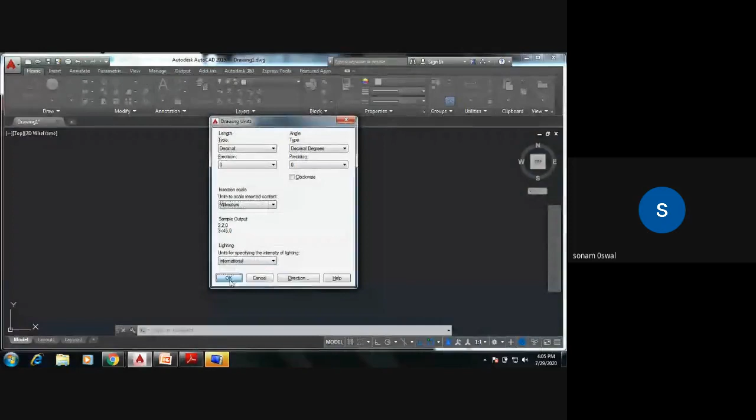Okay, because we give the dimensions, the units are very important. So what we have done, the precision is 0, and the units are set to millimeters, because to sketch the assignments it becomes very easy in millimeters. So this was the second step.

Now the third step was we have to define the limits. LIMITS. Now what the AutoCAD is asking you is to specify the lower left corner, which is 0,0. So you have to just press enter.

Next thing is we have to define the paper size as 420 comma 297, enter. Why have I given this? Because I have set it to A3 paper size. So it is again the choice of the users, whichever you want.

Now so these were the three steps. First of all, the UCS icon. After that you set the units, and then you set the limits. Okay, so we have defined these.

Now next, we need to do the drafting settings, because we need to be ready to prepare the drawings. Before that, you have to make your ortho mode on, which is F8. So what I'll do, I'll press F8. So ortho mode is on, because the ortho mode gives me straight horizontal and vertical lines.

Okay, now next thing I have to do is DS, that is drafting settings. Now what you have to do here in drafting settings is set the object snap modes: endpoint, midpoint, center, which we learned about yesterday. So it gives you the flexibility in the drawings whenever you keep the object snap modes on.

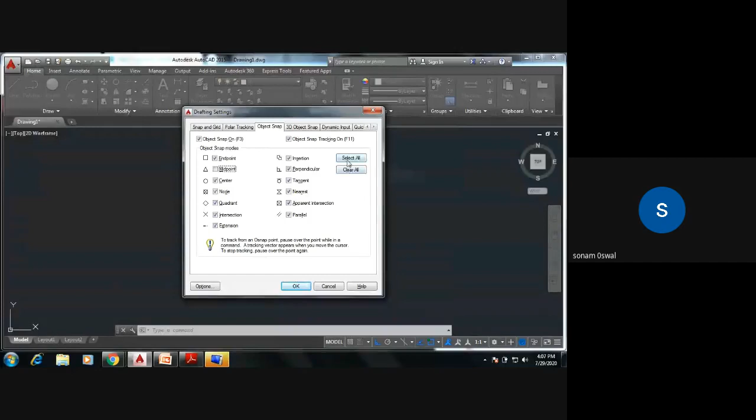So make sure you select all, otherwise sometimes the midpoint is unchecked. So what happens is you go to make the drawings, and whenever you want the midpoint, it's not visible. At that time you have to select all. Now the prerequisites are done, so we are ready for the further task.

Now the today's agenda is what we are going to learn today: the rectangle command, the circle command, arc command, and the types of circle command, and the assignments on it. Now let's move to the rectangle command.

So from here you can create the rectangle. It creates a rectangular polyline. Why is it called a rectangular polyline? Because the rectangle consists of many lines, and whenever there are many lines, we call it a polyline.

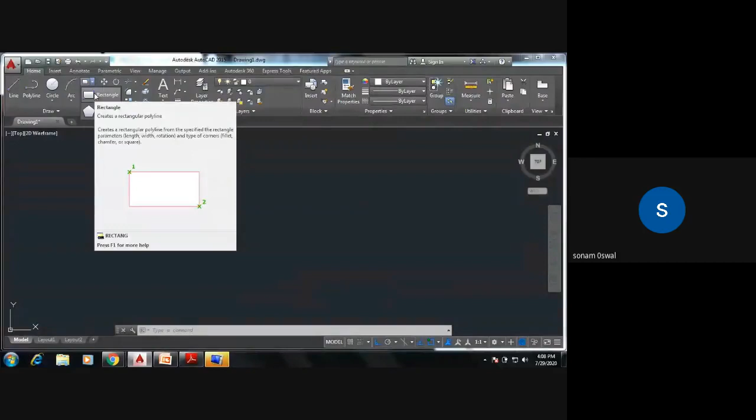Now what I'll do, either I can select from here, or I can type from the keyboard: REC, rectangle, enter. Now whenever you enter it, it is asking you to specify the first corner point.

So I'll give the first corner point. After that, it is asking to specify the other corner point. So I'll just click for the other corner point. See what I got - a rectangle.

Okay, but this rectangle is not as per the dimensions, it is just a rectangle. As we discussed earlier, we engineers never do vague drawings. We need the dimensions, we give the dimensions, because without the dimensions we cannot proceed further. So what I'll do now is make the rectangle with the help of dimensions.

REC rectangle. Yesterday we learned some smart commands as well - to repeat the previous command, press the space bar. Specify the first corner point. Now, since I want to use dimensions, my input would be D for dimensions. Now it will ask you to specify the length for the rectangle. Suppose I say 100, enter. Specify the width for rectangle, suppose I say 150. See, I got this rectangle.

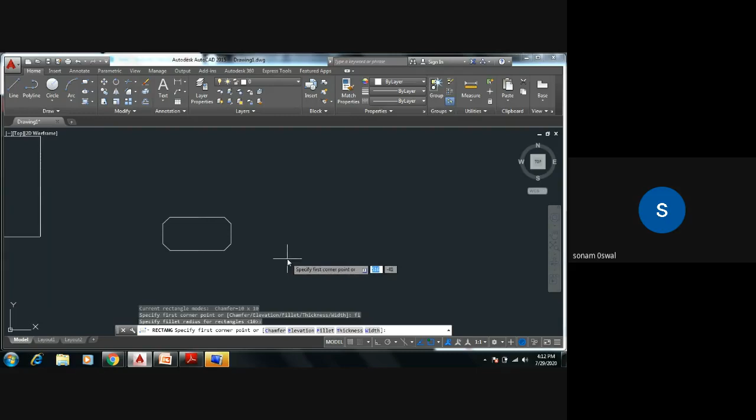Once let me show the filleted rectangle, then I'll revise how to do it. See what I'll do, to repeat the same command, space bar. Now you have to give the input, that is fillet - FI fillet, fillet radius is 10. Then specify the first corner point. See, in this way you got it. Now next, the same process - D for dimensions, so 100 for length, and suppose width also if I give 100. See, in this way you got a filleted rectangle.

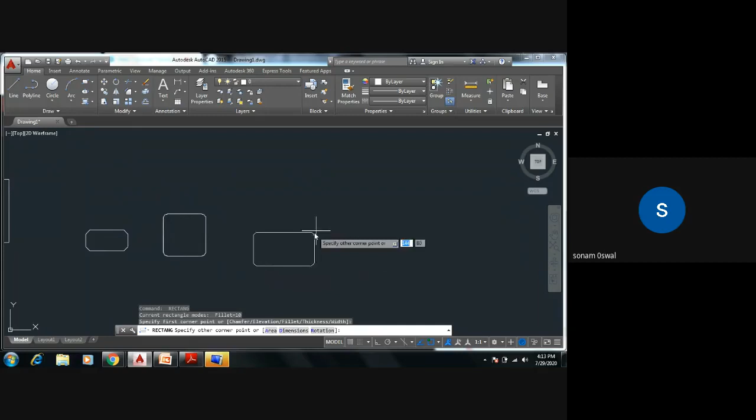So first case we learned was a normal regular rectangle. In the second case we learned chamfered rectangle, and in the third case we learned filleted rectangle. Now next step - suppose I want a regular rectangle. Spacebar to repeat the same command. I'll specify the first corner. I'm not giving any initial input as of now, but still, what is happening? I'm getting a filleted rectangle.

How is it possible? Can anybody suggest me what it can be? Any logic? You can type it in chat. What could it be? Can anybody say the logic? I want a regular rectangle, but still it is coming out as a filleted rectangle. Any logic from anybody, guys?

See, okay, what I can do over here is REC rectangle. The initial input you gave was FI for fillet, I will make it 0. Enter. And then if you specify the first corner point, in this way you got a regular rectangle. Is it clear? So in this way, this is the rectangle command.

See what we have learned - REC rectangle, specify the first corner point, yes you have specified it. Next step is D for dimensions. After D for dimensions, specify the length for rectangle, that is 100, enter, width 100, enter. You got like this - so this is a regular rectangle. Z enter, A enter. Okay, so this is a regular rectangle.

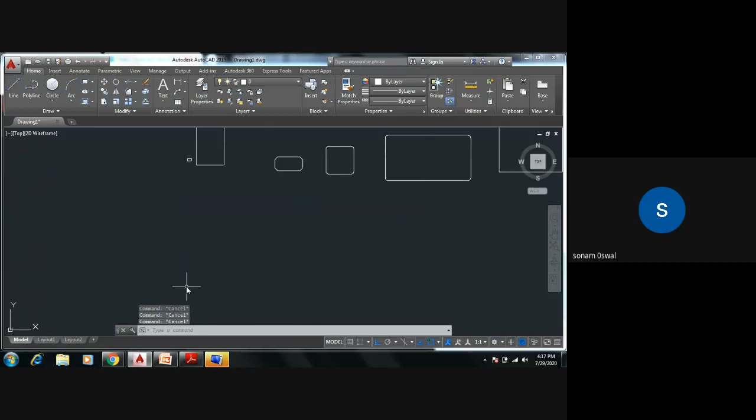Now I have made it randomly. So this is what the rectangle command. Okay, now next step is we are going to learn about the circle. Is it clear? Everybody got the rectangle command?

Yes, very good, even Kiran has answered it. Yes, everybody got the rectangle command. Is anybody having doubt, or should I repeat? Let me know in the chat box. If you got it, if it is cleared, press yes. If not cleared, press no. Otherwise I'll move to second command, that is circle. Okay, I think so everybody got it.

Okay, now we'll go for circle. There are various types in circle command. So if you look over here, there are types. So first is what? Center radius. What does this mean? It creates a circle using a center point and a radius.

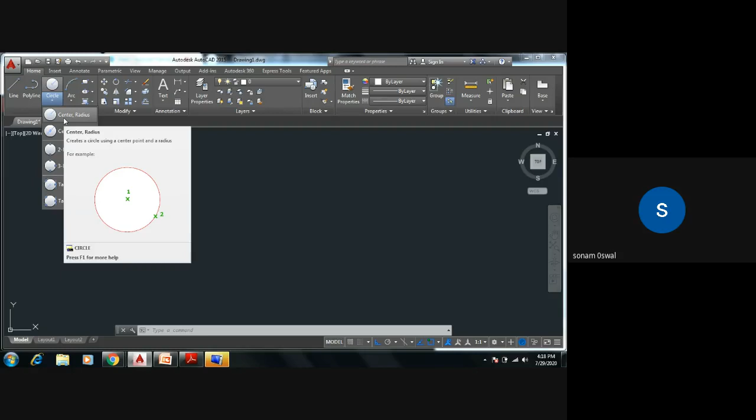Okay, so what I have to do, specify a center point, and then you can give a radius, whatever the radius would be. Suppose I give the radius as 45. So in this way you are getting the circle. Okay, see, so this was with the help of what?

From here you can go with the help of keyboard as well. So initially we discussed that AutoCAD is a shortcut based software as well. So C, if you press C for circle, then specify the center point. Then R for radius, already by default it is being selected. Just give suppose 100, you are getting it like this.

Suppose if you want to give the diameter, then what you will do? Again spacebar to repeat the same command. Specify the center point. Then D for diameter, and then you can give the diameter as 150. Okay, so in both the ways you can do it.

Suppose if the requirement is to give the radius, you can go with the radius, by default it is there. If you want with the diameter requirement, you go with the diameter, because normally when you place the dimensions, it is in the form of diameters, as per the rules of dimensions as we learned during our engineering graphics. So these are the circle, first type.

Then second type, suppose the center diameter, I told just to see, specify the center, and directly you can give the diameter as well. Suppose if I give 250 as the diameter. So in this way also you can create the circles.

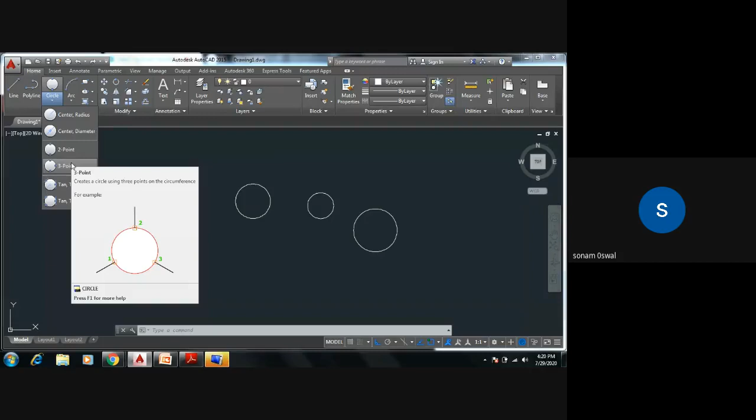Okay, so that is 2 point. After that 3 point is nothing but using 3 points on the circumference. See like this, first, suppose second, and third, wherever you are going to click it like this. So in this way, this is using the third point, using 3 points on the circumference. Now next step is we are going to learn the most important types.

These two are more important, and this center, radius, and diameters are important. These 2-point and 3-point options are rarely used, but you should know them. In applications, tangent-tangent-radius and these two, that is radius and diameter, are used more frequently.

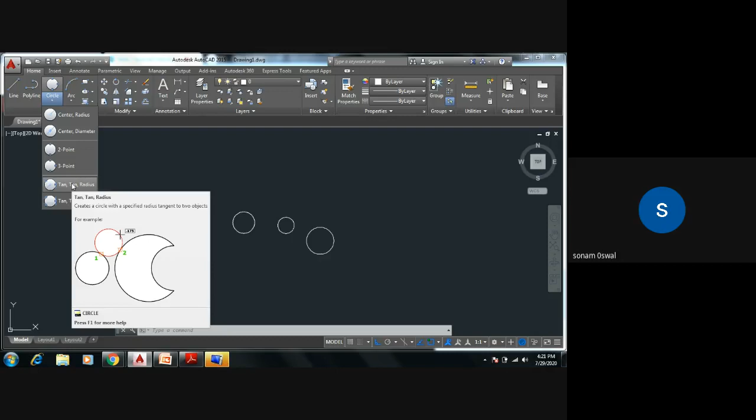Now let's see what is this, tangent tangent radius. By the name tangent tangent radius, what you come to know is that it creates a circle with a specified radius but tangent to two objects. Let me simplify it for you.

Now the simple thing is, if you go for C for circle, then TTR, that is tangent tangent radius. If you specify the first point, select the second point here, and specify the radius, suppose 208, then with the help of this point and this point, you get the circle. Is it clear? So this is tangent, tangent, radius. Once again I'll repeat it.

Control Z. C for circle, see, with the help of this also you can do it. C for circle, then TTR, that is tangent tangent radius. Then specify point on object. Suppose if you select the first point, second point over here, and then specify the radius, anything, suppose 150, in this way I'm getting it. So this is what tangent tangent radius. Is it clear?

After that, the next step is tangent tangent tangent. This creates a circle tangent to three objects. So if you select it, suppose you give this first point, second point, and suppose third point, considering these three tangents, it will create a circle.

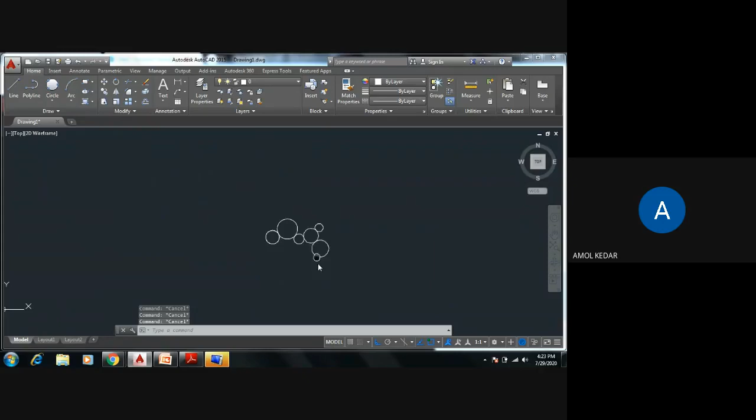So this is tangent, tangent, tangent. Using three circles' endpoints, we are getting a circle. So this way also we use it, but most frequently you're using tangent tangent radius, because in the assignment also I'll show you the application of it.

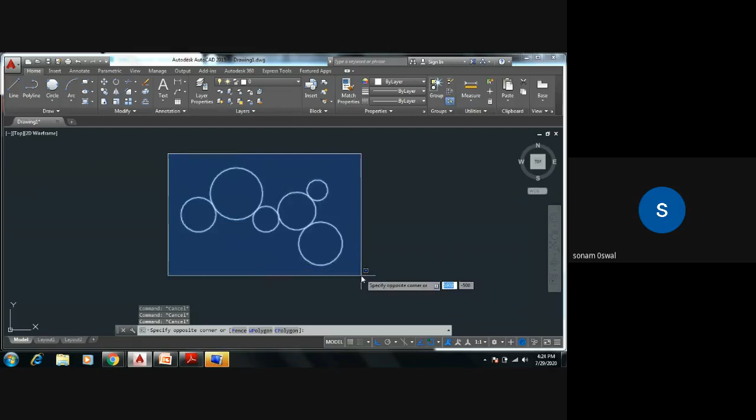Now next we'll move ahead. Suppose yesterday we have learned about the arc. Once again, I'll be repeating it. Suppose L for line.

After that, the next step is we have to go for arc over here, that is start end radius. Specify the start point, specify the end point, and in this way you can create it. Suppose 25 I give, so in this way you are getting it.

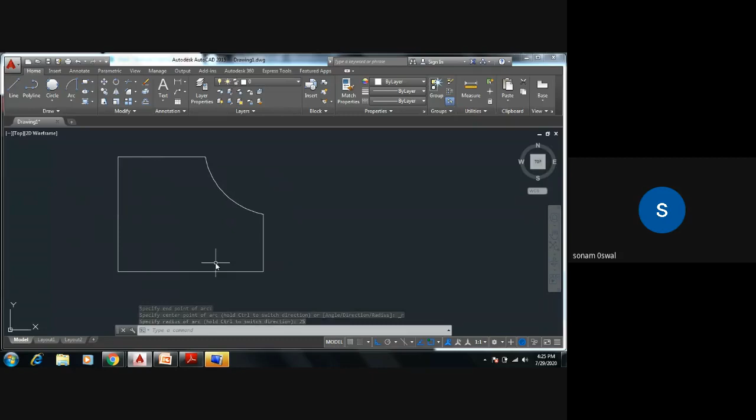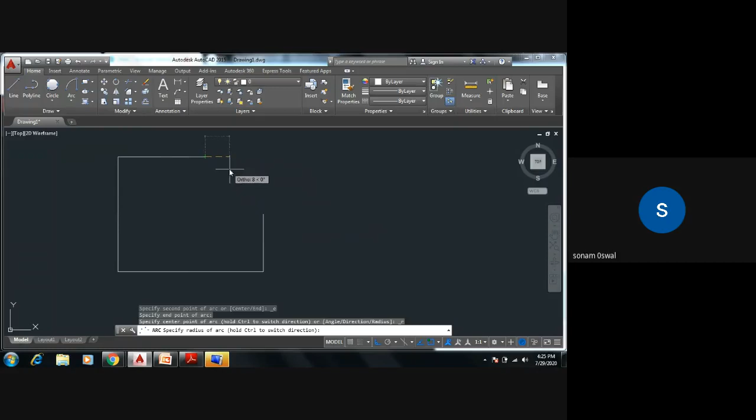Suppose if I want, this is from inside because I have defined my start point from here. Suppose if I define the start point from the end, let's see the difference. Again, start end radius. Suppose if I give this as the start point, this as the end point, then in this way, you are getting like this.

Suppose 20 if I give the radius, in this way, this is the arc. Is it clear? Are you getting it? The arc, and the types of circle.

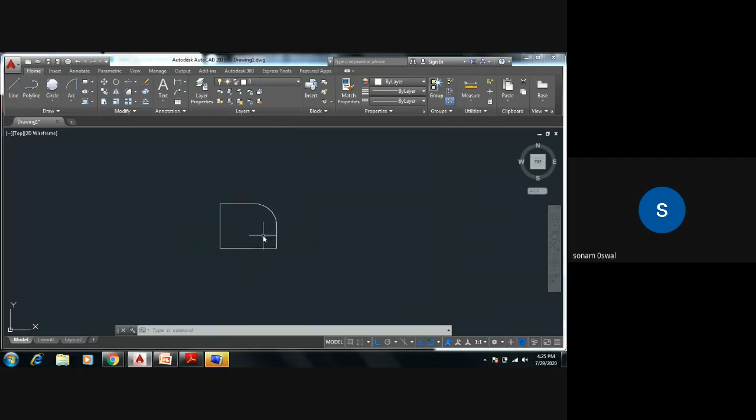Now the next command we are going to learn is fillet. Now you will say we have already learned the filleted rectangle. See, separately, if you want to give the fillets, there is a command of fillet as well. For example, REC for rectangle, if I make it like this, D for dimensions, length is 150 and width is 100.

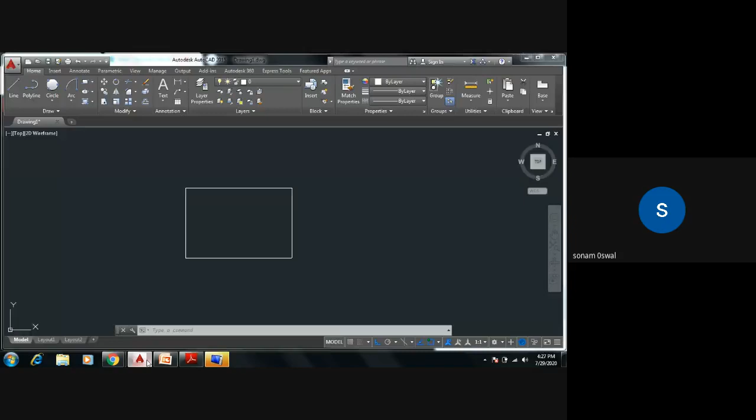Kiran answered that if we want curve, then we use fillet. No, this is not the correct technical answer. So anybody can answer me why we use fillet.

See fillet, see what, why, and how I categorize in this manner. So what is fillet? The rounds at the edge, fillets. It's okay, but how, that I'm going to teach you in the tool.

Why do we use fillet? Siley answered that it gives sharp ends. No, you're close to the answer. Can anybody give me the perfect answer, or more accurate?

If we don't use the circle command... yes, then we need to trim the external or extra portion after using this. Or in fillet, we can directly give the 2 points. Otherwise, there is no need to trim.

So this is actually from a software point of view, we do the modifications, but I want the technical answer. You all have learnt about it, and why fillets are used.

Siley answered: stress concentration can be lowered by using fillet. Yes, very good. To reduce the stress concentration, we use the fillet.

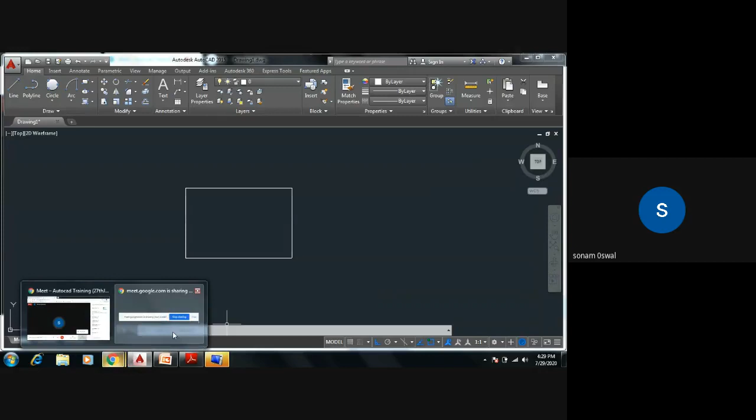Now the answer of fillet was correct. Now let's see how to use the fillet command in software. Type F-I for fillet, enter. Then it is asking you to select the first object.

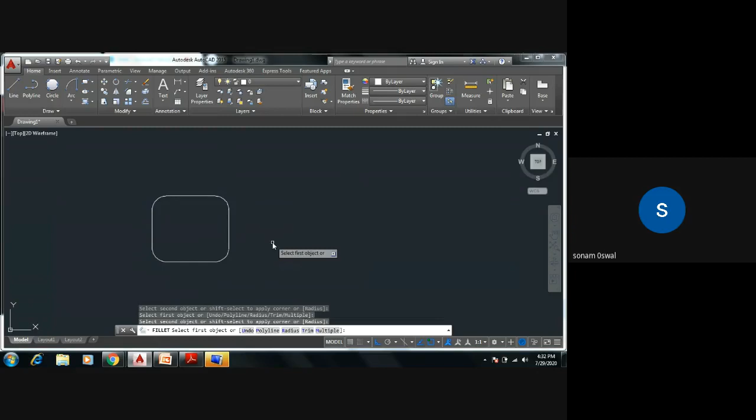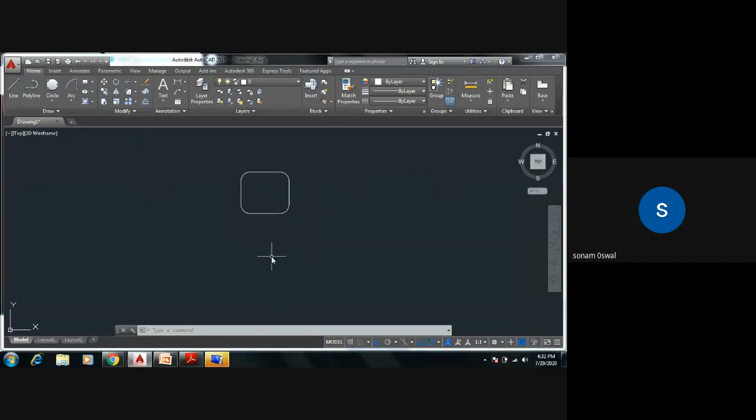So in this way, I got the filleted rectangle. Within the rectangle command also you can use fillet, externally also you can use it. I explained the fillet command now because one of the assignments requires applying the fillet command. Is it clear now? Any doubt in the fillet command?

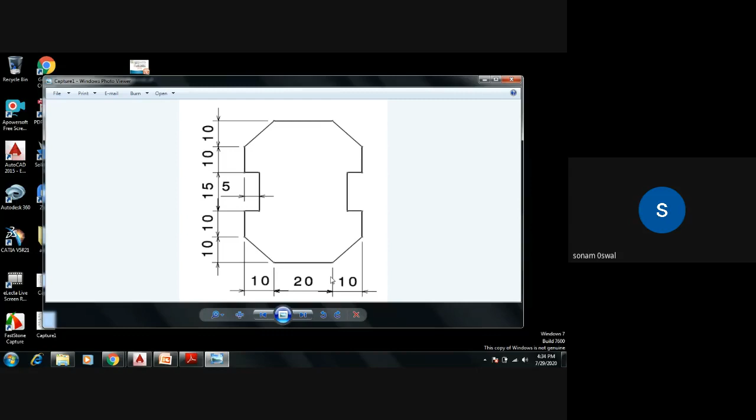Okay, now what we'll do is I'll show you one of the assignments. Suppose this is the assignment - is my screen visible to all? First we are going to apply chamfered rectangle. Is it visible? You can type in the chat box, yes, the assignment is visible. Yes, okay.

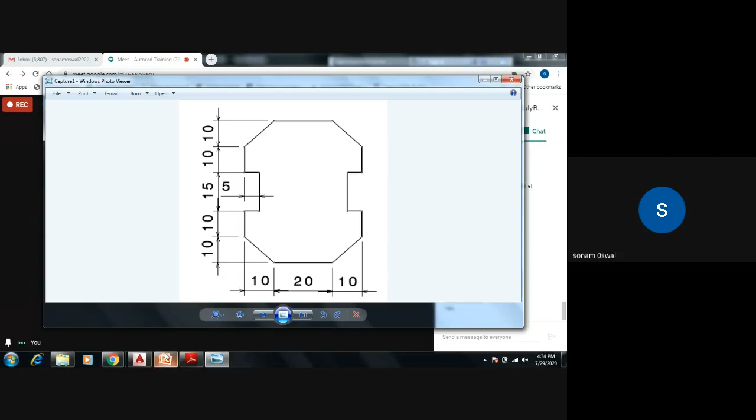Okay, so see what I'll do now. If you look at this, I can make it more simple. We can see that there can be a different methodology also - someone can make a line and then go down like that, something like that, okay. But what we can do is use chamfered rectangle. Simple - REC for rectangle, okay, then CHA for chamfer, you give the unit.

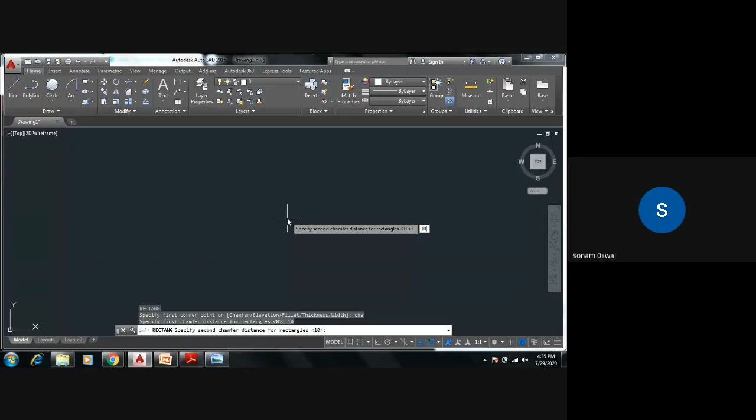Okay, first specify the chamfer. How much is the chamfer distance? That is 10. So you can go for chamfer distance as 10, enter. Second also 10, enter. Okay, then specify the first corner point - you are specifying the first corner point.

Next step is D for dimensions. In dimensions, specify the length, that is 40, enter. And width is how much, 55, enter. So in this way I got it - see how simple we have done it.

Okay, now next step - you have to go like this down. So yesterday whatever we have learned, we are going to apply over here. So L for line. If I go down over here, how much? 10 mm, enter. Then suppose 5 mm, enter, and 15 mm, enter.

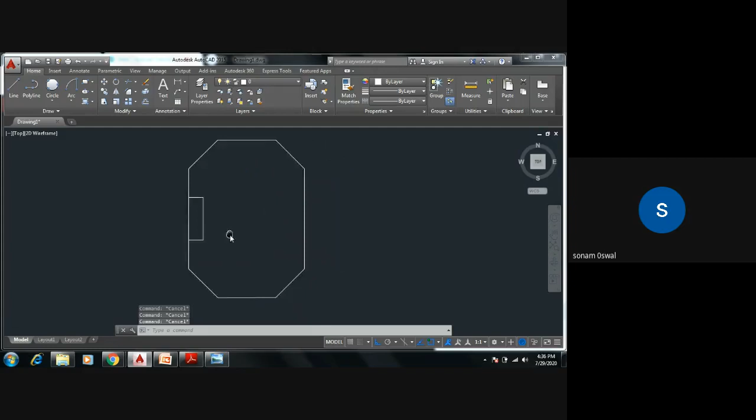So in this way you got this. Is it clear? See, now what we have done here, we just used the chamfer command I showed you. Now you'll ask what about the further thing, how to do it - so here we need to do the trim. I have not explained trim yet, so later on we'll come to this and I'll explain it. So just to apply the chamfered rectangle command I used this assignment - that's all, just how to make it, or how to recognize which command smartly we can use.

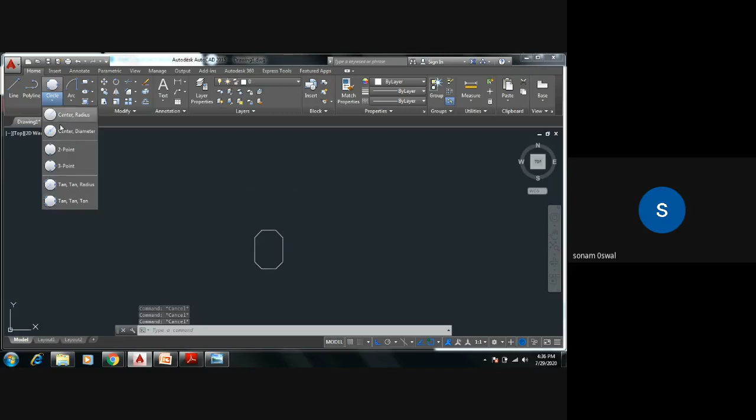Okay, is it clear? Now we learned this command, tangent radius. Now we'll apply that, and we'll also apply this - whenever you track the line distance, for example L for line, when you take it and place it here and then put the distance over it, like 10, without creating the line - so that application we'll see in an assignment too.

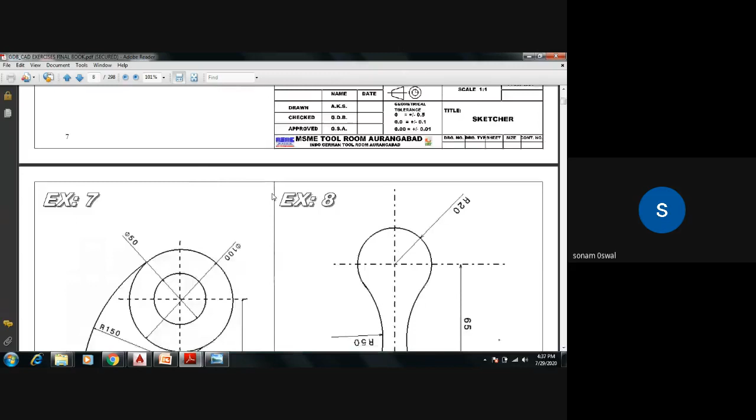Okay, this assignment we are going to see. Okay, so this we are going to solve. Is it visible to everyone? If it's visible, type in the chat box yes or Y. Okay, yes, okay, thank you.

Okay, now we'll move forward. Let's see how to solve this assignment. Okay, what we'll do - we'll start from the base. What is it? 96 plus 10 plus 10, how much does it become? 116. 116 by 25 - we'll make a rectangle of 116 by 25.

Okay, so REC for rectangle. Then specify the first corner point - but I'm getting a chamfered rectangle. So what do you have to do? You have to make the chamfer distance 0. REC rectangle, okay, then chamfer, enter, make it 0, enter, 0, enter.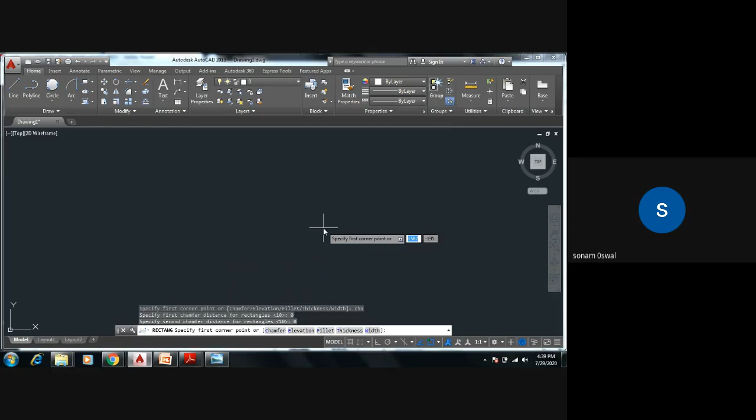Okay, specify the first corner point, and then D for dimensions, specify the length, that is 116, enter. Width is how much? 25, I think so. Escape - it's 25 only. So I made a rectangle of 116 by 25.

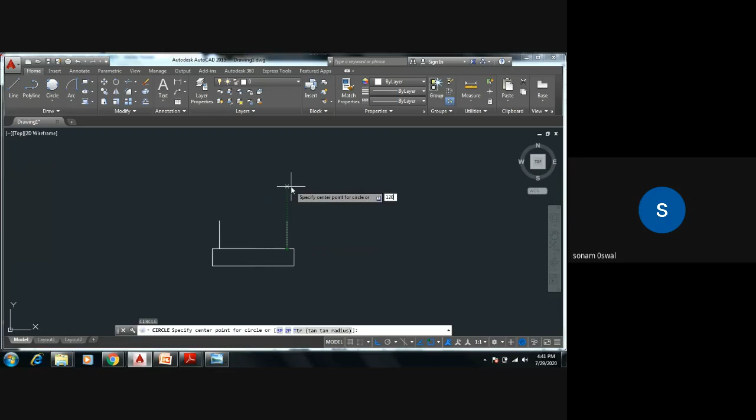Or how much is the radius? So diameter was given as 100. So what you have to do, you have to switch to D, that is D for diameter, enter. How much it is, 100, enter.

Okay, again what you have to do, diameter 50. So again space bar to repeat the same command. Okay, and then you can go like this, D, enter, that is 50.

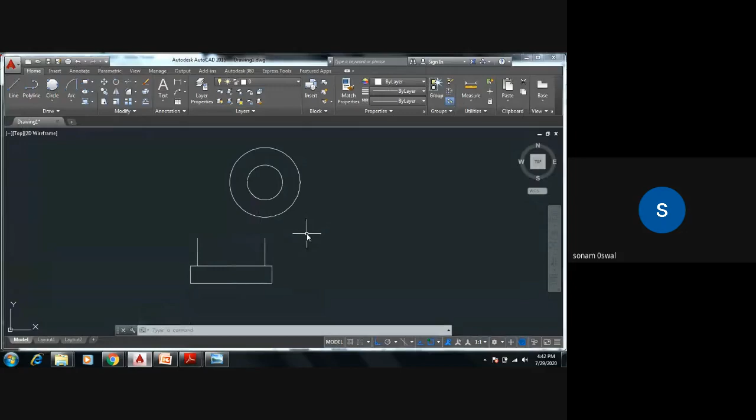Okay, now next step is what, you can make a fillet over here. Okay, so that's why I explained you the fillet, so that it would be easy for you to understand. So F for fillet. Okay, then what you have to do, the second input is what guys, can anybody answer me, second step or the input, what is required for fillet?

What is required? Okay, it's R, radius. Okay, how much radius you have to give, that is 45, enter. So select the first object and the second object. Okay, so in this way.

Is it clear? Okay, now how to create this one, that is radius 150. Can anybody answer me? Guys, can any logic? How I will create such an arc?

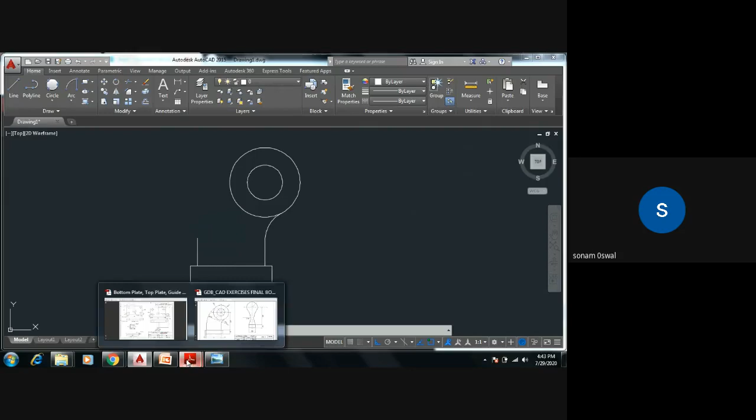Yes, Kiran, Yash, they have answered very correctly. Omkar has also answered previous answer. Okay, so now the answer, can anybody answer me? Which type am I gonna use over here? This arc, radius 150, which type will I use? Can anybody answer just the type? Yes, very good, Umair has answered me that is tangent radius. Yes, Omkar has also said that is TTR. Very good, you guys are getting it and they have been interactive as well.

Okay, very good. Okay, so what I'll do, C for circle. Okay, then what I'll do, TTR. Exactly, okay. Now what you have to do, whenever you go for TTR usage, you check it, where the points - endpoints which I have to select, that is approximately here and then here.

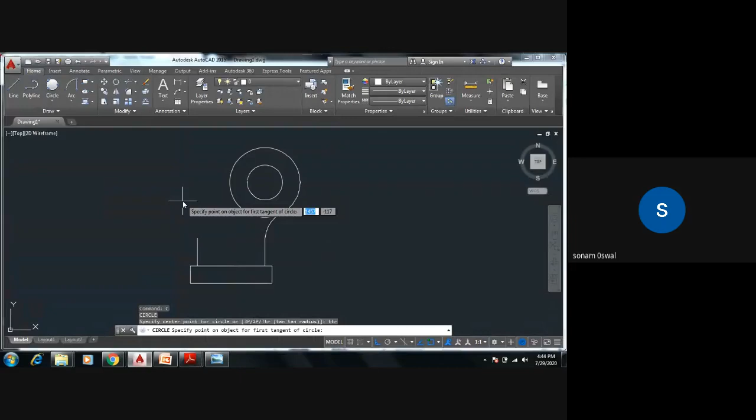Okay, so what you will do over here, that is tangent radius. So specify the point. Suppose if I specify here, then second here, and the radius is how much? 150. So in this way I'm getting it.

Okay, now what I have to do over here, this extra part, how will I remove it? If I select it, the whole circle is being selected. So here, the next command I will explain you, that is trim. Okay, so TR, enter first of all, and like this, in this way you can trim it out.

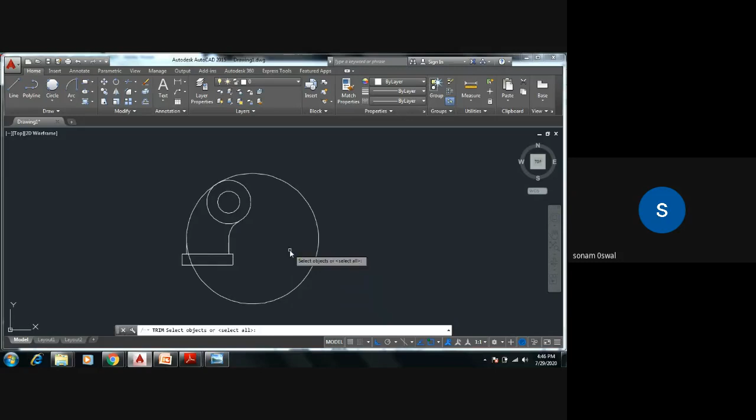इज इट क्लियर? नाउ हाउ यू आर गोइंग टू अप्लाई ट्रिम कमांड, TR, जस्ट दैट इज द शॉर्टकट. ओके, सो TR एंटर कर दो, 2 बार एंटर सिलेक्ट किया तो आपको द रिजल्ट मिल जाता है. समझ में आया? So you got the end result in such a way.

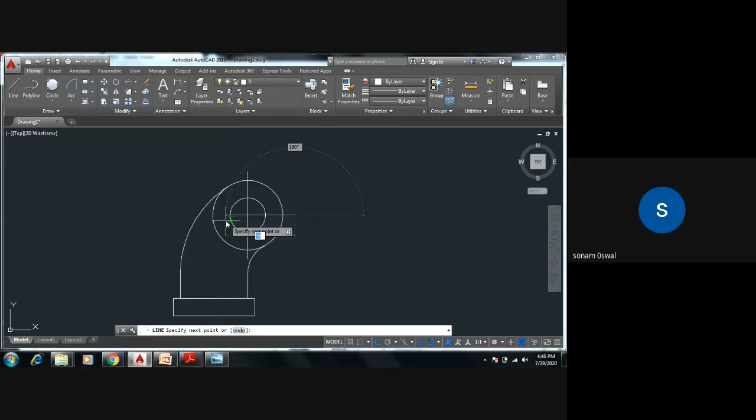So L for line, अभी यहाँ पे मैं lines बनाऊंगी. Okay, so in this way you got it. So in this way we have solved this assignment.

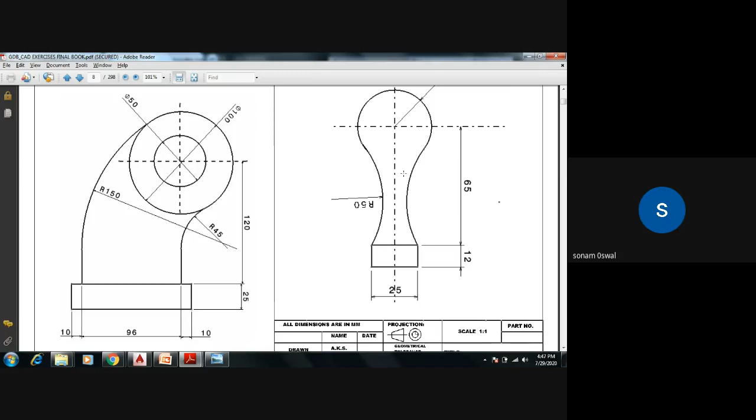अभी suppose ये assignment भी मेरे को solve करना है, तो in the similar way only we are going to solve. क्या यूज करेंगे यहाँ पे, रेडियस 50 को. चलो let me know who can answer it. बाकी का आपको समझ में आ सकता है कि बेस मेरे को बनाना है 25/12 का, एट ए डिस्टेंस ऑफ 65 पे एक सर्कल लेना है, दैट इज रेडियस 20 का, और उसके बाद रेडियस 50 लेना है यहाँ पे. चलो, हु विल आंसर मी इन अ चैट बॉक्स, बी फास्ट.

फिलेट यूज करेंगे और TTR. एनीबडी एल्स कैन आंसर मी? फिलेट इतना बड़ा बैठ सकता है? TTR. Okay, yes, Kiran has answered correctly. Arc you can go for, start end radius arc. Yes, very good.

Okay, now what I'll do, base will make, that is rectangle 25/12. So REC rectangle. Okay, so D for dimensions, that is length is 25, enter by 12, enter.

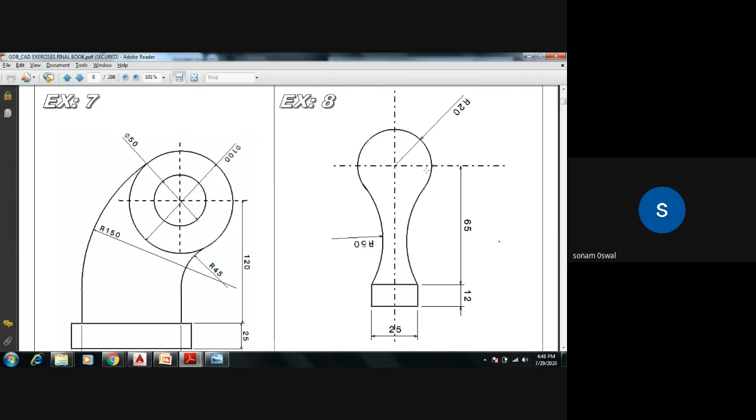ठीक है, उसके बाद एट ए डिस्टेंस ऑफ 65 पे सर्कल बनाना है. सो सी फॉर सर्कल लेंगे, सेंटर से ही अपने को बनाना है एट ए डिस्टेंस ऑफ 65 पे, रेडियस है यहाँ पे 20, तो डायरेक्टली मैं रेडियस डाल सकती हूँ. देखो रेडियस 20 दिया है, सो नॉट नेसेसरी टू गो फॉर डायमेंशंस.

ठीक है, तो देखो आपको जितनी प्रैक्टिस होगी उस हिसाब से समझ में आएगा कि कौन सा कमांड कहाँ पे प्रॉपरली यूज करना है. जैसे आज सेकेंड डे में आपको काफी नॉलेज हो गया कि आर्क्स कौन से यूज करने के, TTR कहाँ पे यूज करना. वेरी गुड नॉलेज, आई अप्रिशिएट करती हूँ कि सर्कल में जो भी टाइप्स आपने सीखे उसका एप्लीकेशन आप तुरंत कर रहे हो, इसका मतलब यू आर गेटिंग इट वेरी गुड, एंड वेरी गुड प्रोग्रेस आई वुड से.

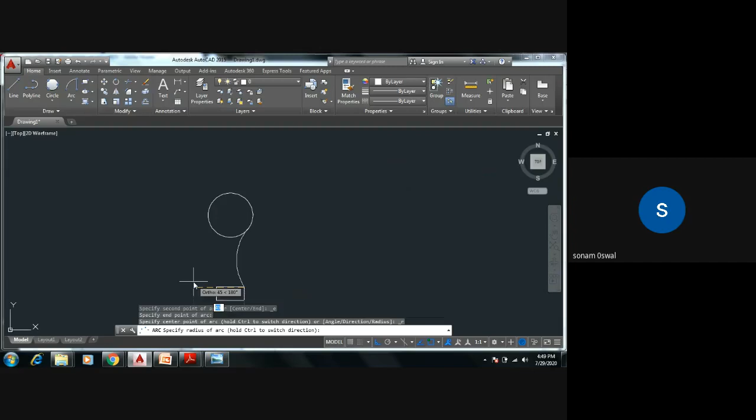नाउ नेक्स्ट स्टेप इज व्हाट, रेडियस विल टेक 50. अभी स्टार्ट एंड रेडियस करेंगे. सो दिस वुड बी माई स्टार्ट पॉइंट और एंड पॉइंट, सपोज मैंने यहाँ से लिया, ये सेकेंड, ये लिया, ड्रैग किया. देखो कितना है, वो 50 है, yes 50 है, I got it.

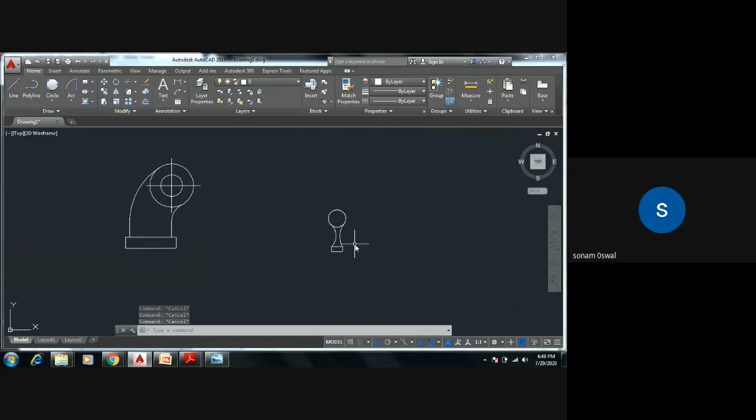Again what I will do here, go for space bar, again enter. ओके, कितना है, 50 है. तो ये एक्स्ट्रा आ गया तो इसको ट्रिम कर सकते हैं, आप ऐसे ट्रिम कर सकते हैं. तो इन दिस वे यू गॉट. नाउ हियर आप बोल सकते हो कि मैम आपने डबल टाइम्स क्यों यूज किया, इफ अ स्मार्ट गाय वुड बी देयर देन आप मिरर यूज कर सकते थे यहाँ पे. यस एग्जैक्टली, बट मैंने अभी आपको मिरर एक्सप्लेन नहीं किया है, सो वी विल बी अपडेटिंग इन अ कपल ऑफ टाइम्स में. ठीक है, सो यहाँ पे मिरर से भी आप कर सकते हो. ये जस्ट मेरे को आर्क एक्सप्लेन करना था, इसीलिए आई हैव यूज्ड दिस असाइनमेंट.

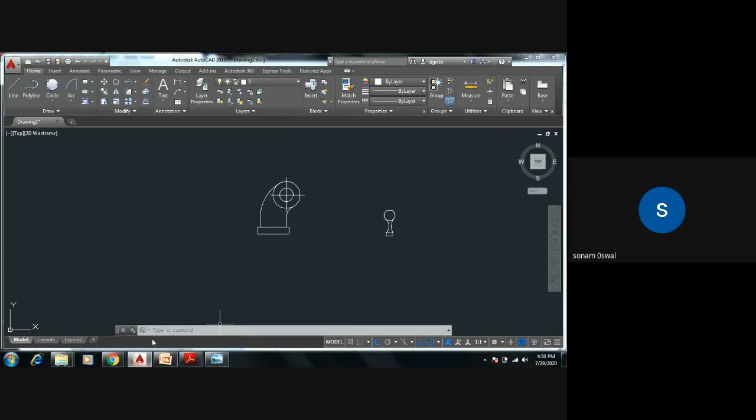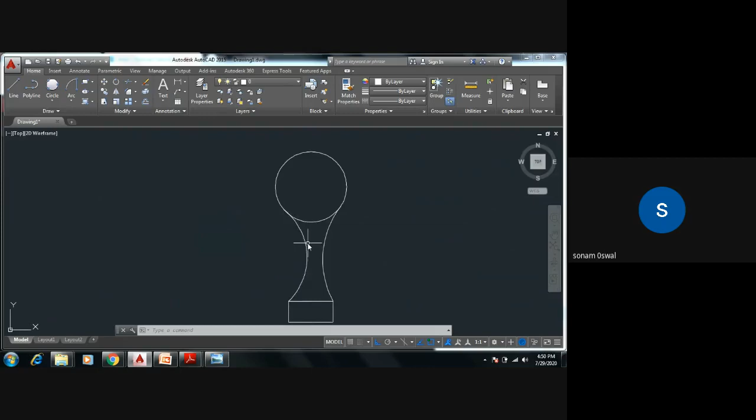मिरर जब सीखेंगे तब आपको इसमें एप्लीकेशन हो जाएगा मिरर का, so is it clear? Okay, why it is looking uneven? Yes, a very good question, Yash ka. Why it is looking, see, because what happens here, I'll show you. ये जो ऊपर पकड़ा है एंड पॉइंट, वो सही से मैंने नहीं पकड़ा जानबूझ के. तो सपोज कभी कभी प्लस माइनस हो सकता है, तो यहाँ पे ज्यादा स्मार्ट कमांड यूज कर सकते हैं, दैट इज मिरर. सपोज मैं मिरर यूज किया, एम आई फॉर मिरर, सिलेक्ट ऑब्जेक्ट किया, राइट क्लिक, स्पेसिफाई द, डोंट वरी आई विल एक्सप्लेन यू अबाउट द मिरर, जस्ट मुझे अनइवननेस जो आया है उसके बारे में आंसर करना है. एंटर. ओके, नाउ यू आर गेटिंग इवन.

Yes, Yash and Amol, are you satisfied now? Yeah, because the endpoints, whatever we have selected over here, was not proper way. There was unevenness into it, so it becomes like that. Okay, so now you got the mirror, from mirror you are getting it, because whatever I have taken here, the similar replica you will get over here.

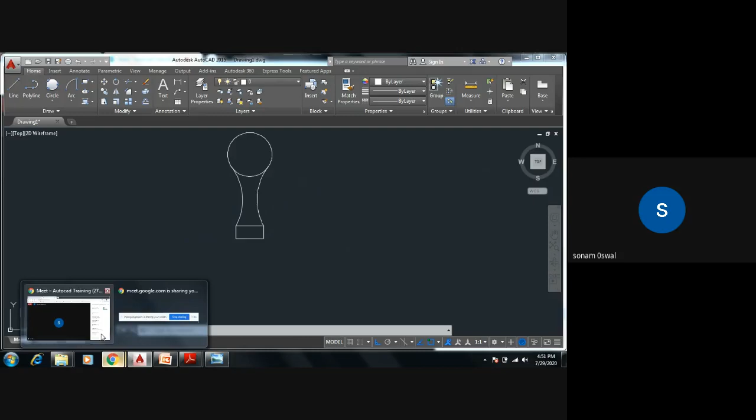Can we use TTR? Yash's question is, can we use it? Yes, we'll give it a try. You can use n number of ways, no issues. It's not hard and fast that you go with this only. Okay, let's try for TTR.

Specify the first point, like this, second point. How much is the radius? 50. So you will get like this.

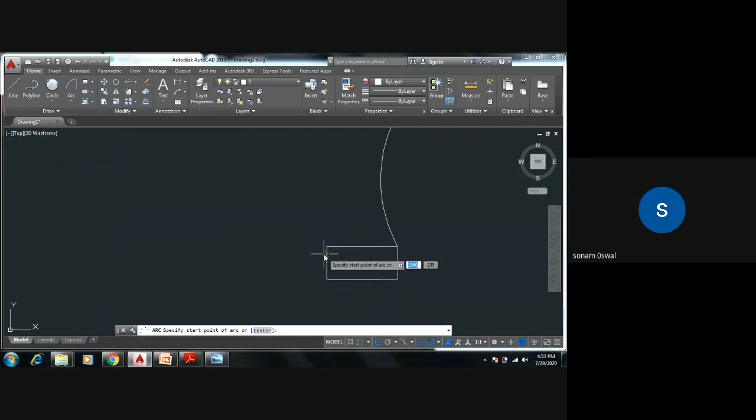So what we'll do, we'll go for arc, start and radius, and I'll see from where the endpoint I have selected. So I'll select like this, specify the first point, then specify the second point, and then drag it, so I'm getting it like this. So the solution would be second, I can use this as the start point and this as the end point. So we'll go for start and radius, and this is the start point.

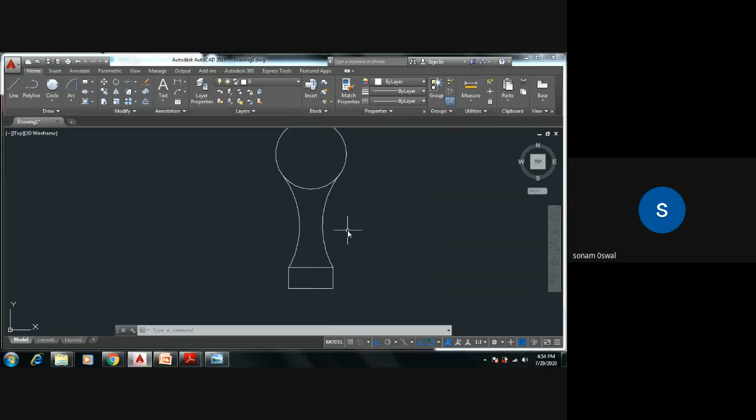I'll go here like this. So in this way you are getting it like this, suppose 50. So using arc, what you have to do is see where it is starting. It takes more time if you use the arc command again. So instead of that, you can use the mirror command. It varies inward and outward.

Yes, exactly, that issue comes over here. If you go for mirror, it becomes a very simple solution. In arc it becomes like that. Don't worry, we'll come to mirror command as well. Are you clear now on the arc command and why I have used mirror and not TTR? You might be getting it.

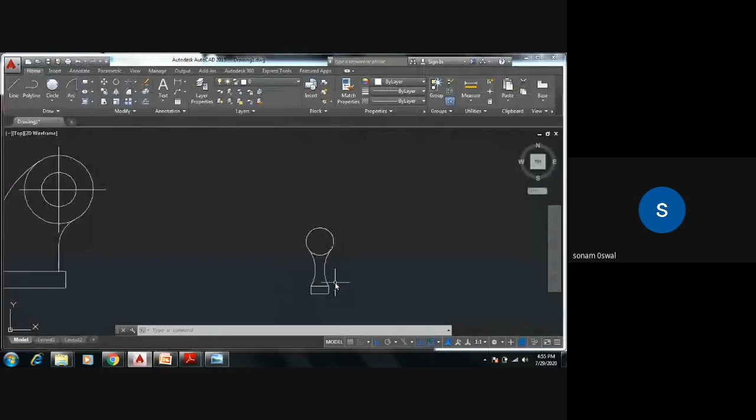So inward outward, it depends upon the endpoints. If whatever your start point is from lower, then it will take inward. If start point is from the upper side, then it is outward. Domer, are you getting it? Okay, yes. So you have got good understanding of arcs, TTR. Whenever you will solve it, looking at the assignments, you will come to know automatically.

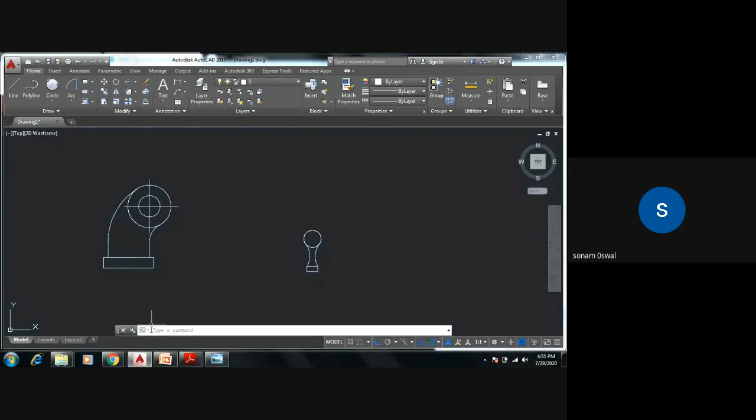Now the next step is we are going to learn about a command that is called offset. We are going to learn about offset.

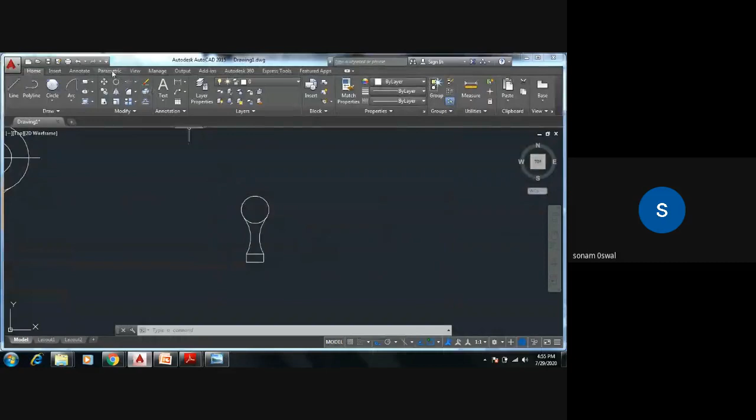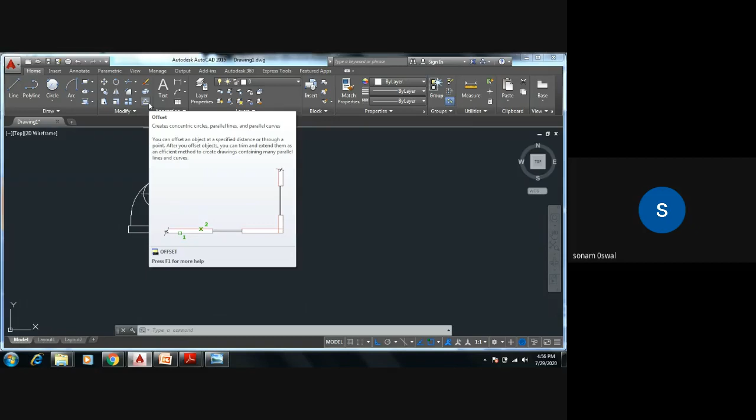See, offset is for what? Parallel lines through a distance. So this offset comes into modification, we are switching to modification commands, this compartment. Step by step. Now the offset command creates concentric circles, parallel lines and parallel curves. So you can offset an object at a specified distance. Meaning if you want to make parallel lines, parallel curves, or concentric circles, for that you can use offset.

So what you have to do, suppose if I go for a rectangle command, I make a rectangle over here. Now the next step is you have to go for offset command, that is O for offset. Offset, specify the offset distance. Offset distance, how much? Suppose if I'm giving it 15.

Okay, enter. Select the object and enter. So in this way you are getting the result in front of your screen. You got the parallel or concentric rectangles, or parallel with a distance rectangle.

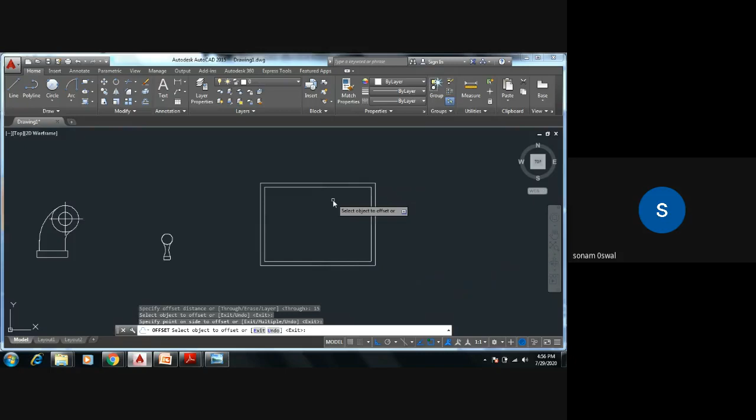So in this way you can select, and you can give the outside as well. If you select and give 25, you can change the distance as well. So in this way, if you want 25, you can change the distance like this.

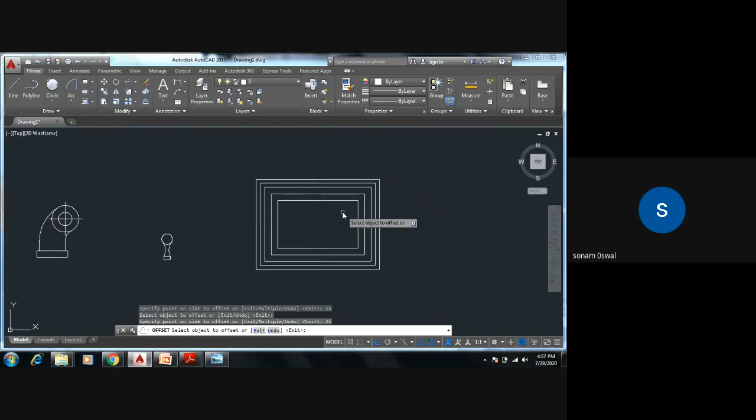Now next step is what? Now the whole rectangle is being offsetted. But I don't want that, because during civil plans, whenever you make like this and if you want only a single line offsetted, then how?

Suppose the second case, if I take a rectangle, and if I select it, the whole rectangle becomes a single entity. Now what I have to do, I will make this single entity into multiple entities.

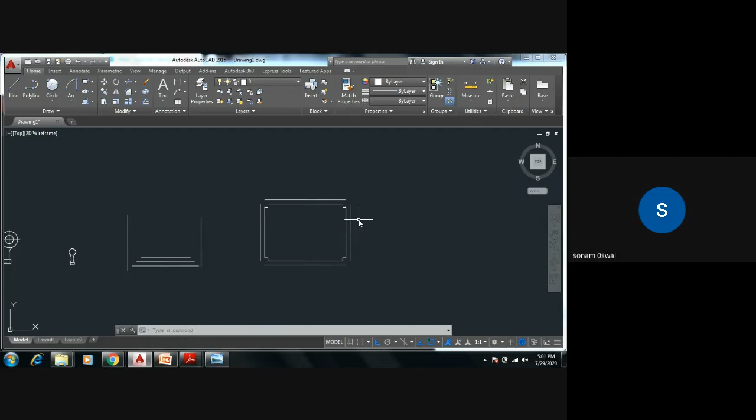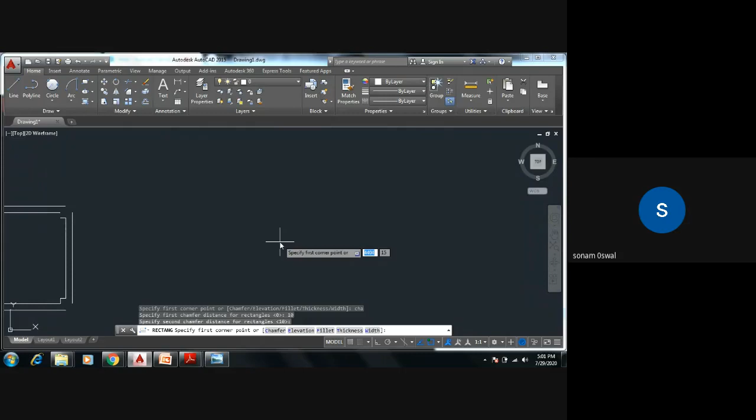Rectangle. Okay, then we have to go for chamfer, CHA chamfer. Distance, how much was it? 10. Do you remember guys? After that, specify the corner point - its length was 40mm and, sorry, we haven't given the dimensions yet.

Rectangle. Okay, so chamfer, specify the distance 10. Then specify the first corner point, then D for dimensions. In dimensions, length was how much? 40. Okay, and width was how much? 55. Enter.

Now next step क्या करना है अभी आपको? यहाँ पे 10 mm नीचे आके 5 mm जाना है और फिर से 15 mm जाना है. ठीक है, so in this way we'll go for L for line. Okay, so we'll come down like this. 10 mm, then go for here 5 mm, again 15 mm, enter, and in this way you are getting it.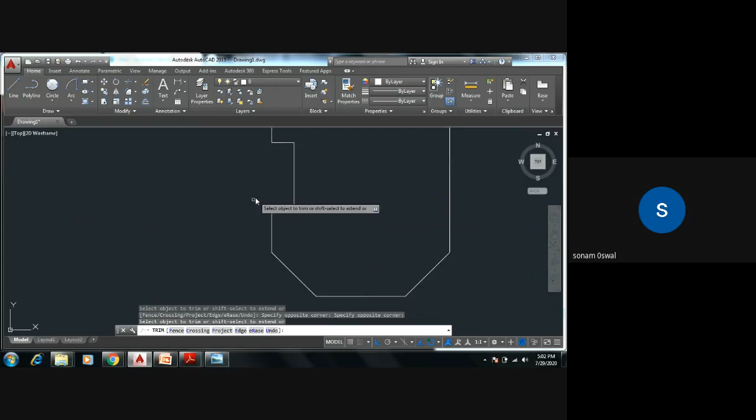Then go for TR, enter, just. Okay, ये मिल गया. ये भी इसी असाइनमेंट में आपको सिखाती हूँ.

नाउ इट्स टाइम टू लर्न द मिरर कमांड एज वेल. ठीक है, तो यहाँ पे मैं मिरर कमांड आपको सिखा सकती हूँ. देखो चलो कैसे हो सकता है वो.

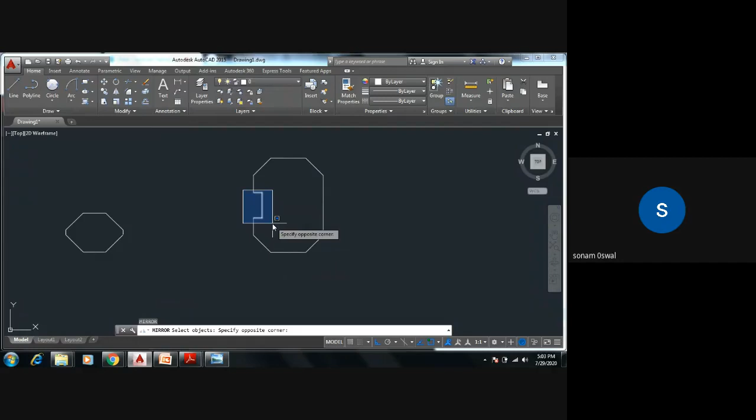MI फॉर मिरर. ओके, सिलेक्ट द ऑब्जेक्ट. देखो मैं कौन सा यूज अभी समझ में आया. लेफ्ट हैंड विंडो सिलेक्शन, दैट इज स्पेसिफिक सिलेक्शन का एप्लीकेशन हो गया यहाँ पे. ठीक है, इसको सिलेक्ट किया मैंने. फिर सिलेक्ट करने के बाद आपको क्या करना है, प्रेस द एंटर. फिर वो क्या पूछता है, स्पेसिफाई द फर्स्ट पॉइंट ऑफ मिरर लाइन. मतलब आपको कुछ तो इन बिटवीन सिलेक्शन करना पड़ेगा ना, ऐसे कि एंड रिजल्ट आपको ऐसा मिल जाए. किस तरफ आपको चाहिए, वर्टिकली चाहिए क्या हॉरिजेंटली चाहिए.

ओके, सो देन इरेज सोर्स ऑब्जेक्ट, और बाय डिफॉल्ट एन सिलेक्टेड. इसका मतलब क्या है, इरेज सोर्स ऑब्जेक्ट मतलब जो सिलेक्टेड है ना वो सोर्स है. ठीक है, उसको जस्ट मैंने एंटर किया. मतलब जो प्रीवियस ओरिजिनल है वैसे के वैसे. देखो फिर से मैं अगर यस बोलती हूँ तो क्या रिजल्ट दिखता है.

एम आई फॉर मिरर, सिलेक्ट द ऑब्जेक्ट. ओके, राइट क्लिक या फिर एंटर, दोनों में से कुछ भी यूज कर सकता है. स्पेसिफाई द मिरर पॉइंट एंड इफ यू से यस तो सोर्स ऑब्जेक्ट निकल जाएगा. बट अपने को तो सोर्स ऑब्जेक्ट चाहिए ना, अपने को तो जस्ट उसका रिफ्लेक्शन चाहिए. इसीलिए वहां पे बाय डिफॉल्ट एन सिलेक्टेड किया रहता है. ओके, तो सोर्स ऑब्जेक्ट वी ऑलवेज नीड इट.

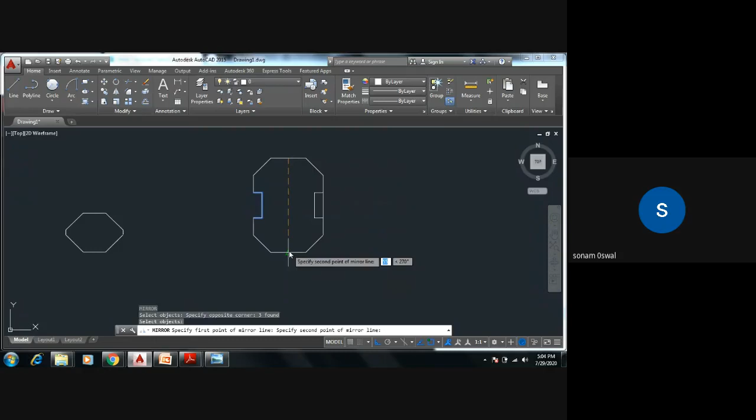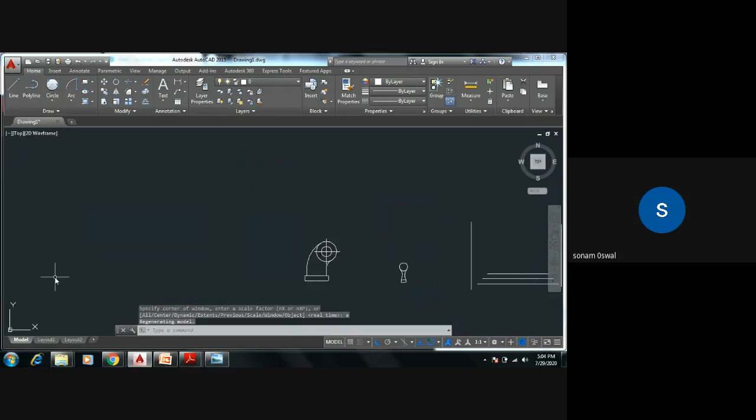ओके, एम आई फॉर मिरर, select object, right click, specify the first point of mirror line. Okay, erase the source object, enter. Now what you will do over here, that is tr, enter, enter. Are you getting it? Z enter, A enter. Okay, is there any doubt in a mirror command?

Yes, we can send you the assignments done today so that you can practice it. No issues, I'll send the group, whatever the WhatsApp group has done. Okay, so you can have it. No issues, okay, definitely you will get it. Okay, so mirror command is not getting, once again I have to repeat it. Yes, Kiran, Saili, just type in the chat box ki mirror command you want me to repeat.

No doubt, okay, so everything is cleared in today's session. So let us revise today's session, whatever we have learned. What we have learned today, the rectangle command. In rectangle command, we have learned about the chamfered rectangle command, filleted rectangle command.

Okay, so what we have to do for chamfered rectangle, guys, just type in chat box whatever you have learned in this session. So let us recollect it. Okay, what you have learned, chamfered rectangle में आपको input देना पड़ता है initially. फिलेटेड में फिलेट देना पड़ता है.

ओके, आफ्टर दैट वी हैव लर्न सर्कल, इट्स टाइप्स में उसके एप्लीकेशन सीखे आपने कि आर्क्स का यूसेज कहाँ पे करना है, टेंजेंट रेडियस का यूसेज कहाँ पे करना है. ओके, टेंजेंट कहाँ पे करना है वो अपन ने देखा है. ओके, आफ्टर दैट व्हाट वी हैव लर्न नेक्स्ट, आर्क दैट इज स्टार्ट टू एंड रेडियस सीखा और अप्लाई किया एक असाइनमेंट में. ओके, आफ्टर दैट अपन ने सीखा ऑफसेट कमांड.